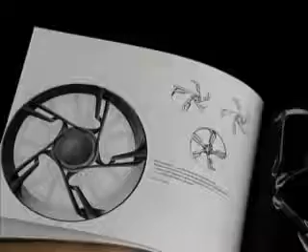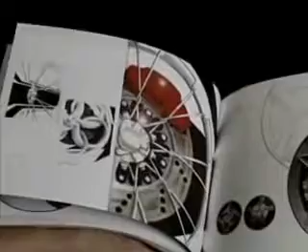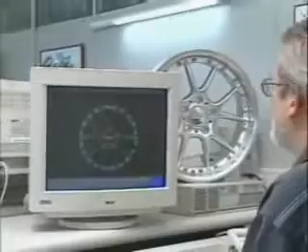Cooperation with highly regarded designers keeps the formal language fresh and satisfies customer-specific brand worlds. Within this creative network, maximum customer orientation and flexibility have proven themselves again and again. Development is teamwork on the customer's premises, ideally in a standardized software environment with problem-free interfaces for the transfer of data models and simulations. Achievements are passed on, results are maximized.

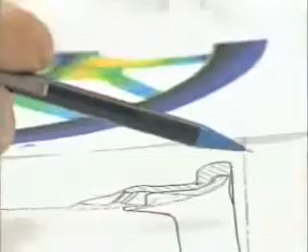At BBS, development primarily involves innovation, and that's why we don't need to keep on reinventing the wheel. Special development modules enable fast results within the cost targets. Simulations allow us to reduce the number of potential solutions down to a small number of finalists. But it's still the test benches that provide the ultimate results.

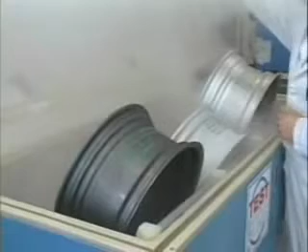BBS has a comprehensive testing area with all the testing equipment used to verify the usual standards and specifications. At the same time, our in-house requirements are far beyond those of the legislative and testing companies. After all, at BBS, every wheel has to be able to withstand the extreme conditions of motorsports.

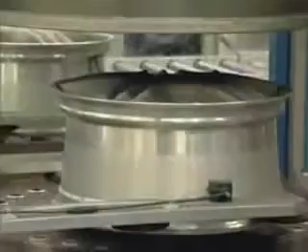Various factors have to be coordinated with one another, such as light alloy construction and stability, aerodynamics and brake cooling, or design parameters and production optimization. Add the highest processing safety and you have a high-grade quality product.

BBS has several production plants worldwide, all working to the same high standards. All car manufacturer certification guidelines are fulfilled. Our ultra-modern process-oriented and self-organizing structures reflect the state-of-the-art in plant technology.

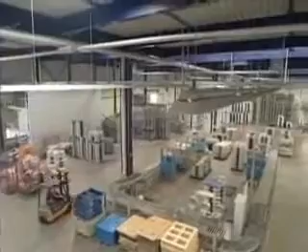The hall layout enables different plant levels, tool changes without production interruptions, parallel production of large and small batches, and redundancies in process-critical applications. Reallocation of capacity on the fly takes place in all our production plants worldwide.

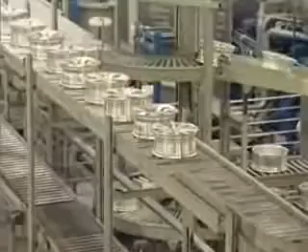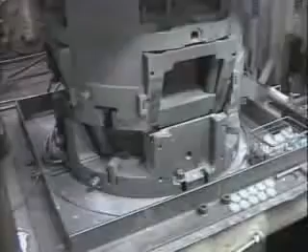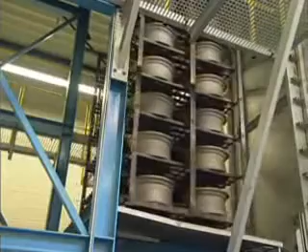The production process begins with fully automatic low-pressure casting machines. The alloys are standardized, but the decisive difference is made by the timing of the processing steps and also the details of our tool construction, like temperature control, for instance. During the several hours of heat treatment, the material properties of the future wheel are precisely adjusted. After the solution treatment furnace, the aluminum structure has the required structure and elasticity for operation.

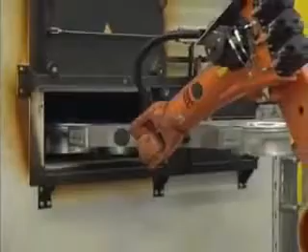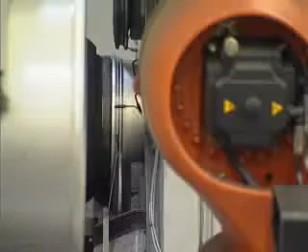In another furnace, the wheel is reheated to the ideal temperature of 300 to 350 degrees. Then it is mounted concentrically on a negative mold. In a uniaxial movement and under high contact pressure, a continually lubricated roller head creates a rotational profile. It's done on the principle of the potter's wheel. The heated metal is simultaneously molded and compressed. This results in more stability, combined with less use of material and less overall weight. BBS is considered the pioneer of this process. It's known as flow forming.

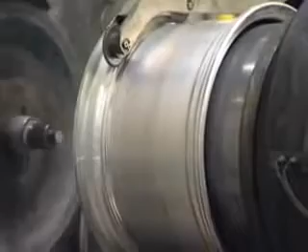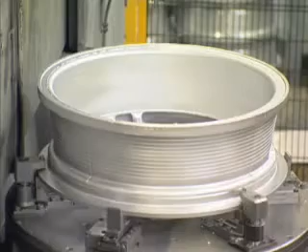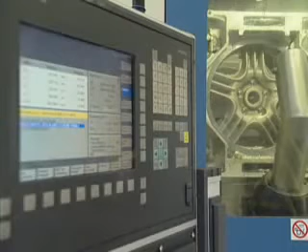After casting, the sprues and burrs are removed in a fully automatic CNC machining station. Bolt holes, the valve hole, and the center bore are also drilled. This is now done dry at BBS. Liquids, which are normally essential for cooling and lubrication during these machining processes, are not added. The overburden is fed straight back to the melting furnace.

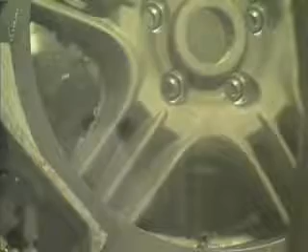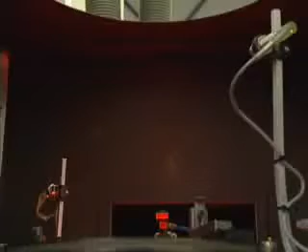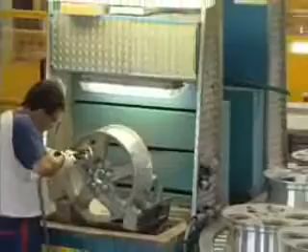BBS specializes in this dry machining process, which has won several awards. The entire station is hermetically sealed in order to prevent any emission of aluminum dust. Infrared sensors guarantee the precision of all contours. With special wheels, the deburring process is still done manually. Largely automated conveyor technology guarantees steady material flow between the machining stations.

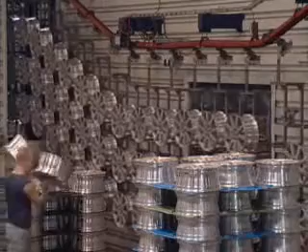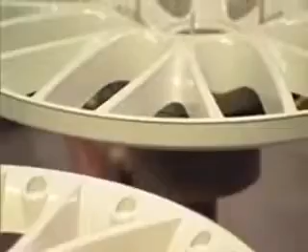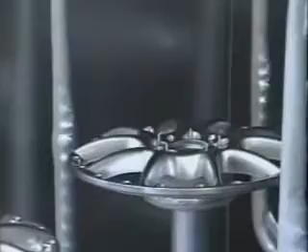With its chrome-free finishing process, BBS has introduced an innovation that has set new standards worldwide. This process has won us numerous prizes, including the Entrepreneur Award for medium-sized businesses. Melting the lacquer by means of powder coating leads to several advantages. The coating is thicker and, unlike horizontal coating, far more even at all locations in the wheel geometry. The double-thick layer of varnish sharply improves scratch resistance and anti-corrosion properties. One reason why the use of BBS wheels in winter conditions is unrestricted.

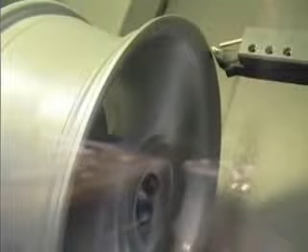Diamond-cut BBS wheels are especially popular. They owe their deep and brilliant luster to a special technique. After application of the coating, it and the aluminum surface are partially machined on automatic lathes using a diamond-tipped tool. This creates a highly attractive alternating pattern between polished and unpolished surfaces.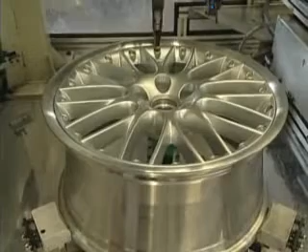High-quality modular wheels are an integral feature of the BBS brand. Forged spokes and flow-formed rims can, for instance, be combined to form an ultralight wheel. The sections are connected by titanium fasteners.

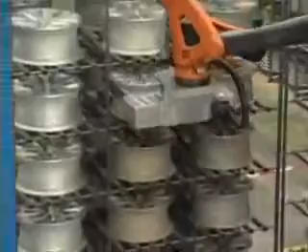OEM demands delivery to car makers, just in time and just in sequence. On the other hand, the aftermarket is characterized by seasonal cycles and fluctuations in demand. These extremely different requirements have to be satisfied by production and logistic planning, from mass production of millions of wheels to a single prototype wheel in motorsports.

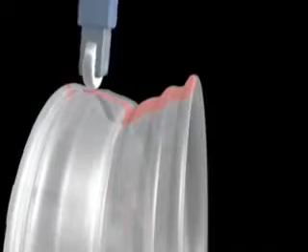With the GTI wheel of the VW Golf 5, an entirely new process of hollow space wheel construction has reached series production. The hollow outer shoulder is created via flow forming without the core being lost or enclosed, a world first in automotive engineering, a breakthrough in cost effectiveness. Hollow space wheel constructions can be made visible in the volume segment.

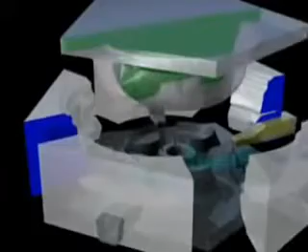The inner shoulder can be formed in just the same way, with considerable benefits with regard to costs, stability, and mass moment of inertia. Combined with the slide die casting process for the spokes, complete wheels with airtight hollow spaces can be realized in a self-contained production process. This is Air Inside technology from BBS.

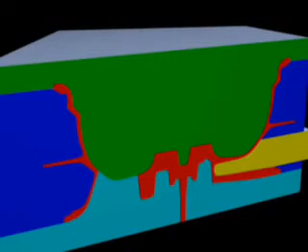Air Inside technology is a good way of demonstrating how the strengths of BBS work together. Restless pioneering spirit, operational excellence, complete command of processes, intensive cooperation with customers, and systematic market orientation all combine here to create a key technology in chassis construction. Less unsprung masses and improved temperature dissipation increase comfort, handling, and safety.

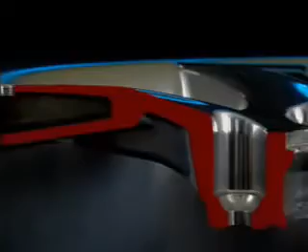The airtight hollow spaces enable new approaches to tire pressure compensation while the vehicle is in motion and reduce tire damage risks. The achievable ratios between wheel load and wheel weight are exemplary. The wheel design also achieves an entirely new dimension of freedom.